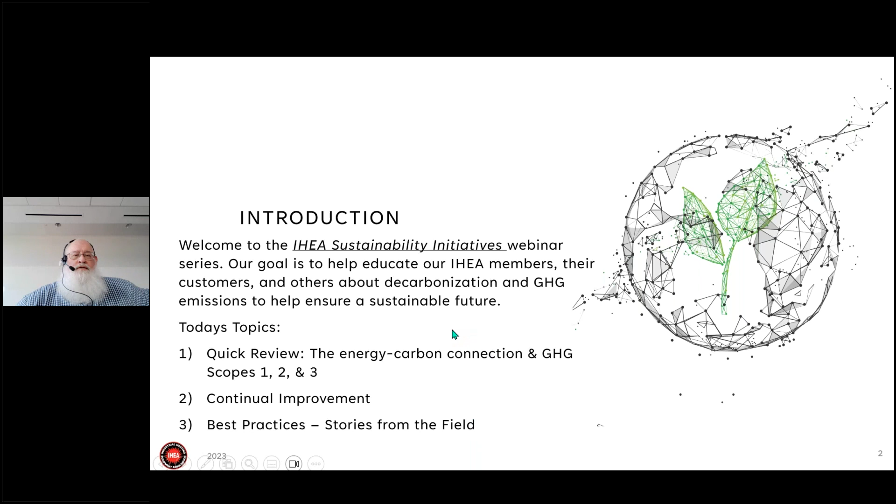Let's talk a little bit about the energy carbon connection. We tell people this all the time: the best way if you want to manage your greenhouse gases and your carbon is to manage your energy, because most of the greenhouse gases, and if not all of the carbon in your greenhouse gas emissions, comes from consuming energy. This is the big picture of energy.

Yes, I know this is an eye chart, but I just want to make a couple points here. If you look at the left-hand side, this is a Sankey diagram, and the left-hand side is the total of all the energy consumed in the United States in 2021, which is almost 100 quadrillion BTUs. Quadrillion is 15 zeros, so it's million, billion, trillion, quadrillion. And these are the sources. So this adds up to 97.3, and then it breaks apart and goes across, and the other side adds up to 97.3. So this is how energy flows through the United States.

A lot of energy, as you can see, is used to generate electricity. Looking at our areas, commercial buildings, but primarily industrial, you can see not that much of industrial is electricity. There's quite a few fossil fuels still being consumed, natural gas particularly, and petroleum products, a little bit of coal, but also electricity. I want to make the point that electricity is not squeaky clean. It's not all nuclear and hydro and solar. There's quite a bit of coal and natural gas still in the electrical generation for the United States. And this will need to change as we move forward into a greener environment. Hopefully we can reduce some of the consumption of fossil fuels in industry. And of course, you hear lots about electric vehicles down here. So that's kind of a really big picture of where the energy goes.

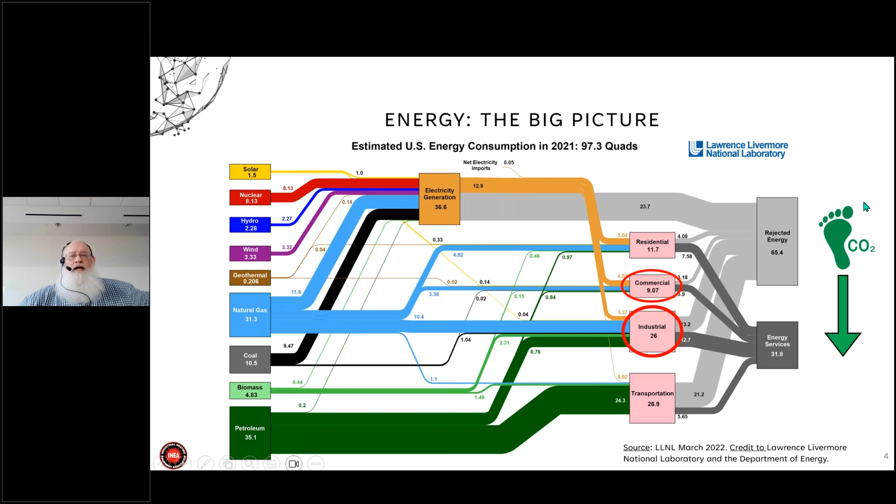Again, we're looking at how can we reduce our greenhouse gases through managing our energy. One thing to really think about is energy efficiency in terms of greenhouse gas reduction. This is what you pay for. You bring energy into your sites. You manufacture, you have a commercial building, a hospital, a college campus, an industrial process heating site. This box, that's your system, that's your building, that's your process, and you pay for natural gas and electricity and bring that in. You want to get as much of that energy as you can to add value to your product.

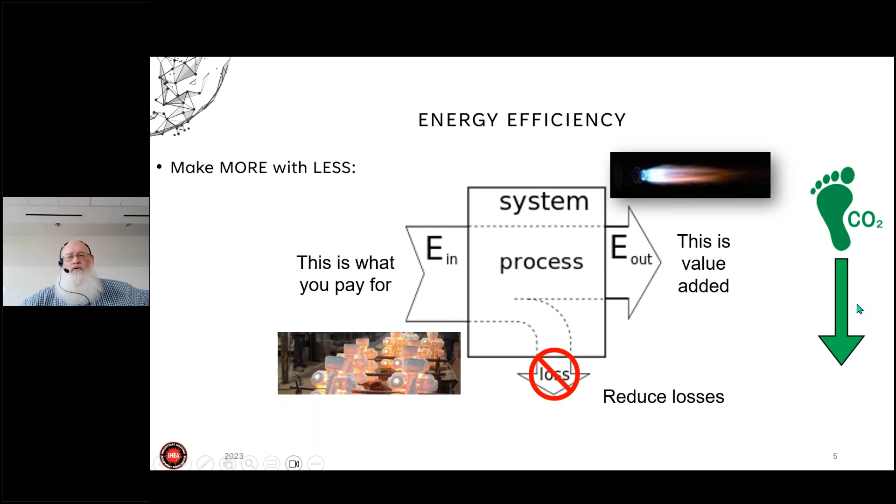And reduce these losses to an absolute minimum. That's what energy efficiency projects can do. And also, energy efficiency improvements will improve or reduce your carbon footprint.

Energy and carbon are directly connected. It's chemistry, there's no way around it. This is the way the world works. If you take methane or any fossil fuel organic carbon molecule with carbon and hydrogen in it and mix it with oxygen and combust it, you will get carbon dioxide and water vapor. That is the way the world works.

This is methane, and that's the pure equation, but if you think about typical combustion, you have air. So you have nitrogen that just kind of passes through, no reaction. Air is about 20% oxygen, 80% nitrogen, and a lot of little odds and ends. But again, methane plus oxygen gives you carbon dioxide and water vapor, plus the heat. You get the heat, that's what you want. The heat of combustion to do the process, to run the furnace, the oven, the melting, the baking of the cookies, whatever the process may be.

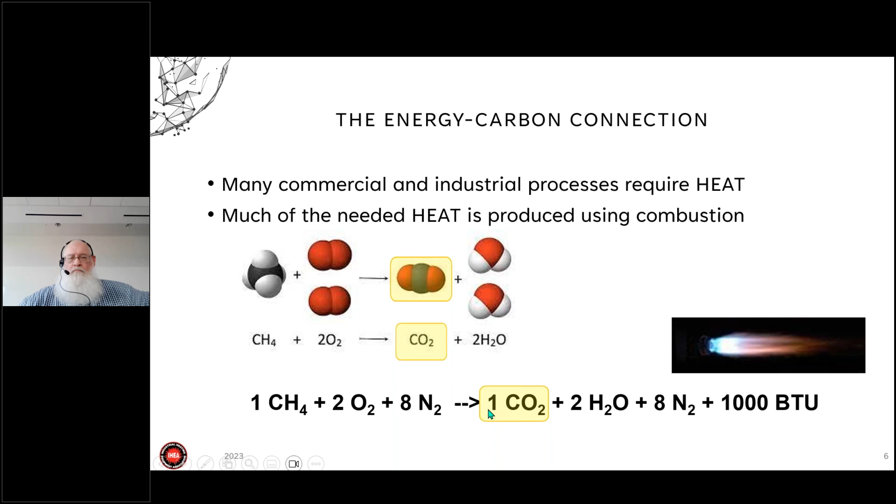But this is the problem, combustion - this is gasoline, diesel fuel, methane, coal - makes carbon. Thus, carbon footprint. Carbon is the biggest contributor to greenhouse gas emissions, and we'll see that in a minute.

Electricity may be a good alternative to combustion for a heating process, but electricity is not magic. Electricity is not free from carbon footprint impact.

This is the 2021 national energy mix of all the electricity generated in the United States, and a full 58, 59% is still generated from fossil fuel. So if you electrify a process, yes, you might eliminate natural gas consumption, but your electricity is going to have some component depending on your regional location and how your electric utility generates their electricity. You may have something that's very heavy coal or very heavy natural gas, or you may have an electrical utility that's very heavy on nuclear and hydro and renewables. So it depends on your location.

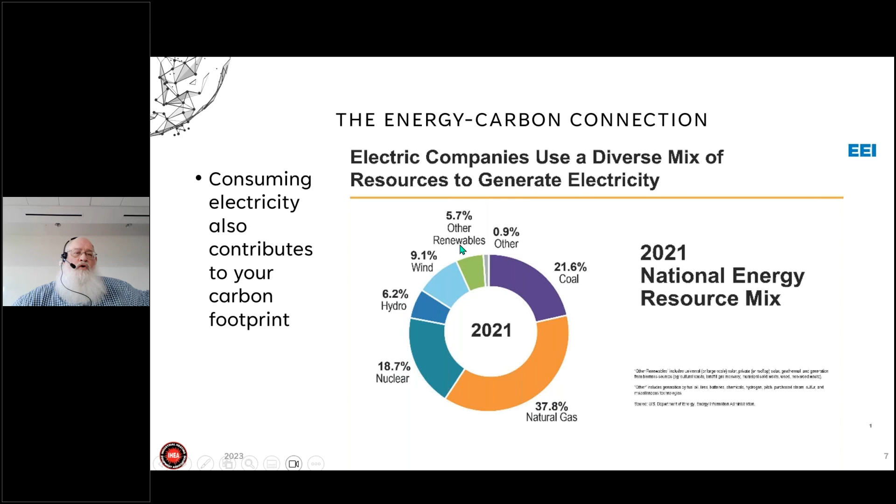Looking at this map of the United States, Alaska and Hawaii, different regions have different amounts of carbon, and these numbers you see in the big boxes are pounds of carbon dioxide created for every megawatt hour of electricity produced. So you can see there's a wide range. California is very, quote, clean and green electricity, versus Hawaii, which is 3 times the value, the amount of CO2 produced per megawatt hour of electricity. So this varies regionally. If you have a plant in San Diego versus a plant in Texas versus a plant in Minnesota, your contribution of carbon from the electricity you consume is going to be different.

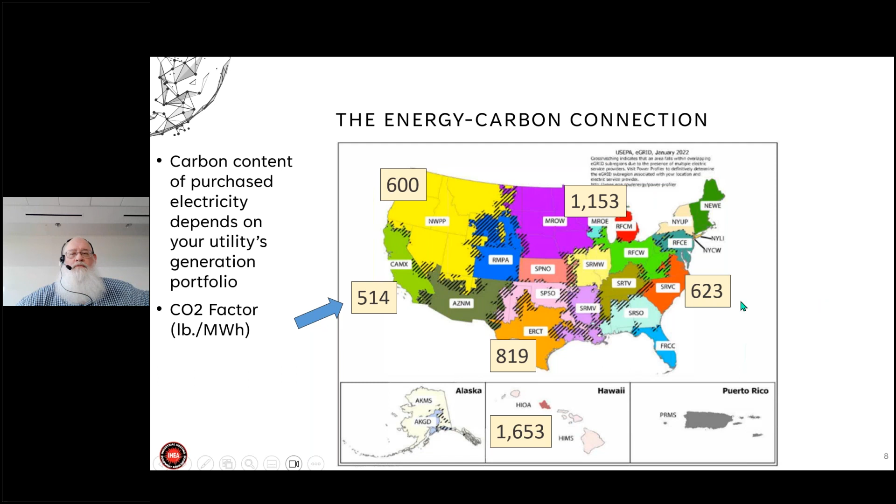Carbon combustion from natural gas is the same everywhere. It doesn't matter, you burn natural gas, you're going to get so much carbon out, period. If you consume electricity, the carbon content of your electricity will vary regionally, and there's quite a bit of variation. Those are just some example numbers.

So if carbon dioxide stays in the air for 100 years, it's going to warm the atmosphere because it captures the sunlight. Sun comes in, it heats the Earth's crust, it radiates, but it can't get back out to outer space. It's captured. It's the greenhouse effect. It's just like building a greenhouse. It can be 103 degrees inside a greenhouse on a cold winter day because the sun shines in the greenhouse, the heat can't get out.

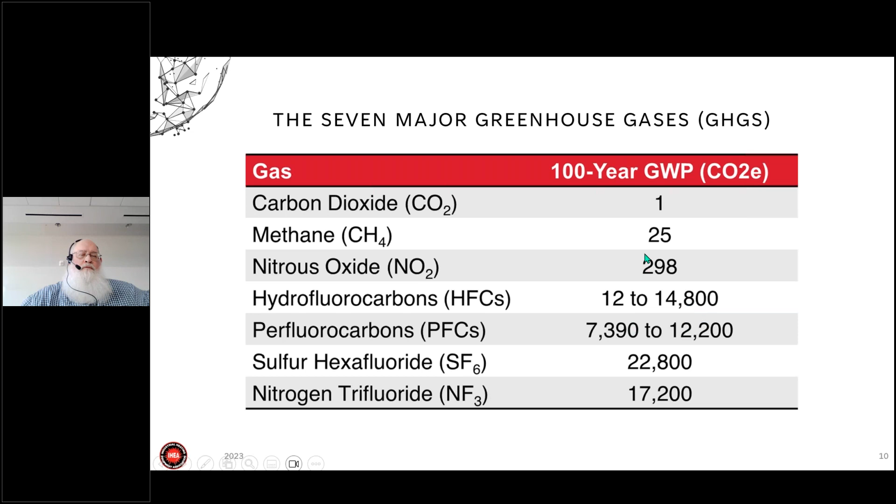It's much worse. But look at sulfur hexafluoride, 22,800 times worse than carbon dioxide. Now, again, there's not much of this around. It's pretty rare. But hydrofluorocarbons, perfluorocarbons, those are all the refrigerants in your air conditioning units. Air conditioning's everywhere, so there's a lot of this stuff out there. And if it leaks to the atmosphere, it can be very, very potent in terms of global warming.

But why do we call it carbon footprint? Because carbon is the big deal. Carbon is the big one. This is all from combustion in cars, internal combustion engines, boilers, generating electricity, all the process heating that a lot of the IHEA companies build and supply and their customers. And methane is second. Nitrous oxide is pretty big, and then the fluorinated gases, and you can see some of those others don't even have enough pie.

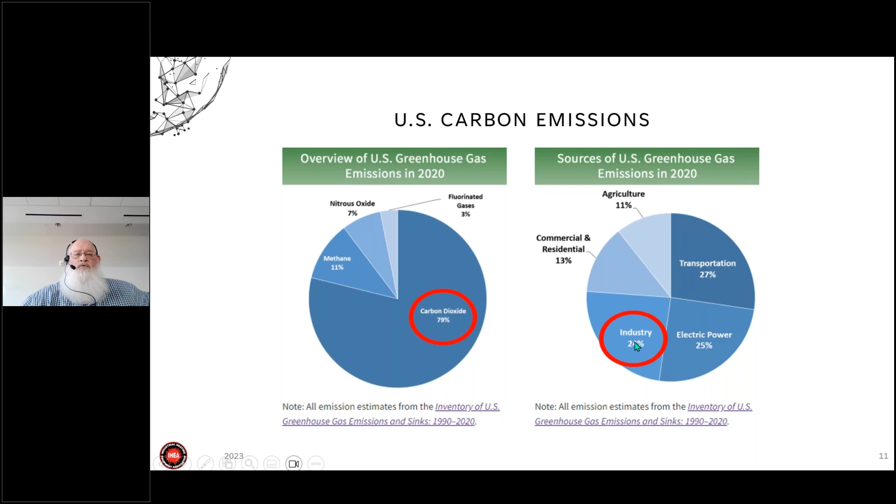But this is why it's called carbon footprint, because over 3/4 of the gas emissions from industrials, or this is from the US, not just industrials, come from carbon. And industry is about 1/4. So you can look at commercial and agriculture is about 1/4, transportation is a little over 1/4, electric power generation. So we're in this area. Most of us operate in the industrial area, and industry is responsible for about 24% of all the greenhouse gas emissions in 2020.

Greenhouse gas scopes. There's 3 scopes. There's more than 3, but there's 3 primary scopes. Scope 1 is that carbon equation. Methane plus oxygen gives you carbon dioxide and water. If you're burning, if you have combustion on your industrial site, if you make equipment that uses combustion and people use that, that is scope 1 carbon, direct emissions. You burn it on your site, the carbon goes in the atmosphere.

Or you have a lot of vehicles that you're operating with gasoline to run your business. Think about the US Post Office. They have 232,000 vehicles, and most of them are internal combustion gasoline or diesel engines. That's the internal combustion, that's direct emissions, that's scope 1.

Scope 2 is all the electricity that you buy. It can be other things, but like if you buy steam or chilled water, but mostly it's electricity. The electricity has to be generated somewhere, and you use it, but it has to be generated somewhere, like we said, with a regional carbon footprint from the generation equipment, and that's your scope 2.

Scope 3 is everything else it takes to run your business. Scope 3 is raw materials, how do you get the materials to your plant? And then you build it at your plant, that's scope 1 and 2, and then you ship it, and it's used out in the field, and that's all the downstream. So all the upstream impacts and downstream impacts of your product, that's scope 3.

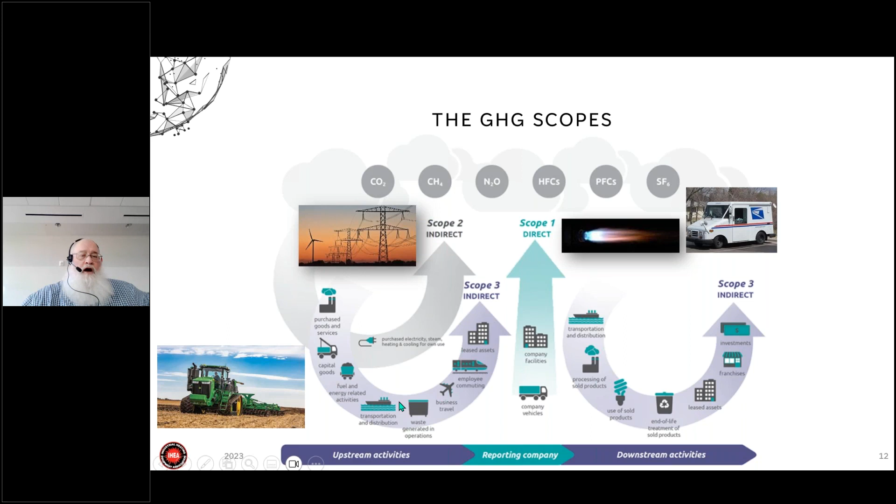So a little bit about continual improvement. One of the things that we want to encourage people to do that are looking at energy management and carbon footprint is to have a continual improvement process. This is an example of a company we work with.

It was a wastewater treatment plant, and this is kilowatt hours per million gallons of water processed over 18 months. They were around 7,000 kilowatt hours per million gallons, and they did some energy management implementation, some energy projects, and it really came down pretty quick initially, and then it kind of leveled out.

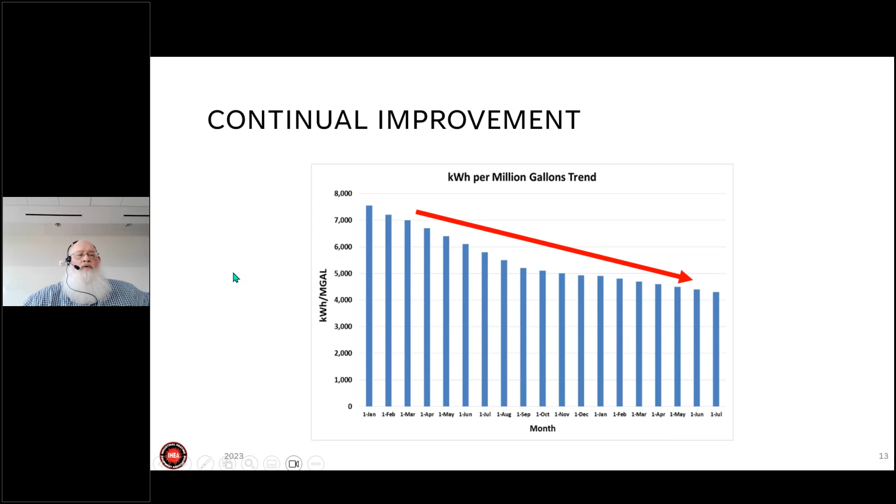It got a little harder to keep improving, but that's a great trend, and that's what we want to encourage. If you think about an energy management pyramid of various levels of managing energy, there's basic energy management, where you put your energy bills in a spreadsheet and track how much energy you're using. Then you may want to advance to other programs.

There's ISO 50001, the energy management standard for international standards. There's a 50001 Ready program. There's a Better Buildings, Better Plants program. There's lots of stuff available on DOE that you can use to help manage your energy and start improving. Then you can get full ISO 50001 certification, and Superior Energy Performance is like the top of the mountain. That's a DOE program—very rigorous, very challenging.

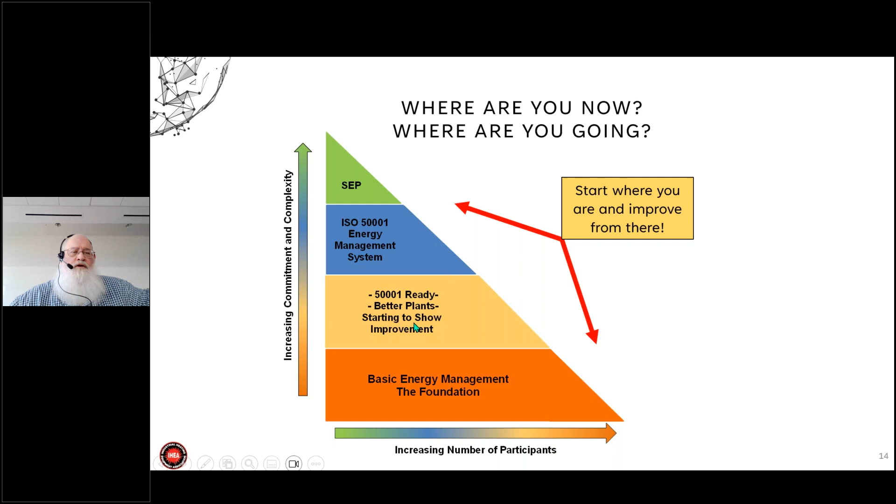So fewer people do this, many people do that, but as you go up this pyramid, it becomes more commitment, more resources. But the key for companies—IHEA member companies, IHEA customers of members, or anybody that does process heating or heavy industry, energy-intensive industries—the key is to figure out where is your point A and B. It doesn't matter what somebody else is doing. You can say, we don't really have anything. Let's start with basics, and we want to move up here to really improve and implement some energy management. So wherever you are, start where you are and improve from there.

Again, all of this that you do to manage energy will only help you to be more sustainable, to meet your environmental, social, and governance goals, to meet your carbon footprint goals, to be net zero by 2040, or whatever goals you may be facing as a company.

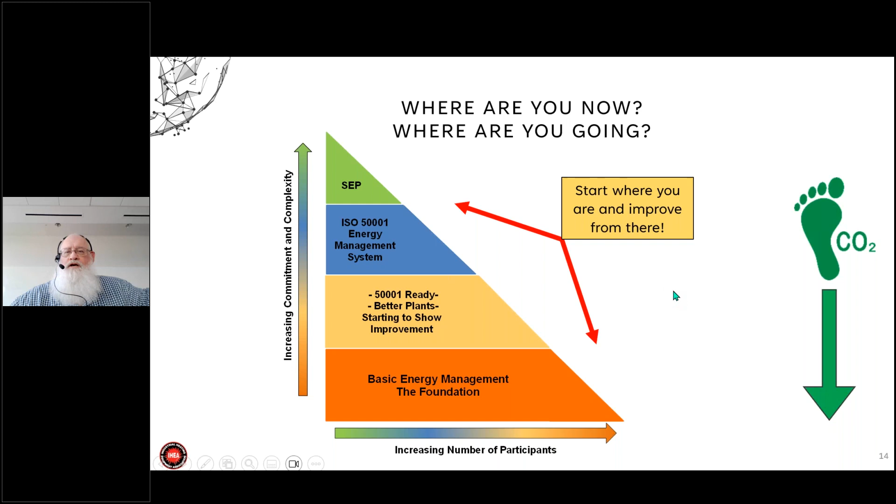Again, ISO 50001 is the energy management standard. The 2018 version is the latest version. It's a great document. It's not easy—it is challenging, and there's quite a few things you have to do to meet this and get certified. 50001 Ready is a program of training and implementation for 50001, sponsored by DOE, that you can do without getting certified.

And it's based on the Plan, Do, Check, Act cycle. In a nutshell, this says you say what you're going to do to manage energy, and then you do it. A little bit later, you check and see, are we doing what we said? And if we're not, we're going to act to fix it, and then we're going to repeat. This is not a project—this is a process. Plan, Do, Check, Act, Repeat. That's where you get the continual improvement. You build this into the day-to-day business activities that you have, and it's just part of what you do. Instead of being something extra for a project, this is just how we do—Plan, Do, Check, Act our energy, and repeat.

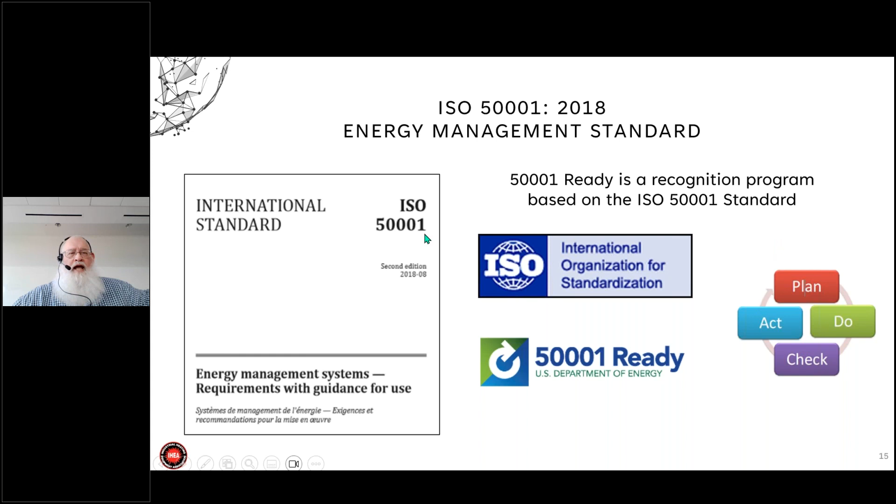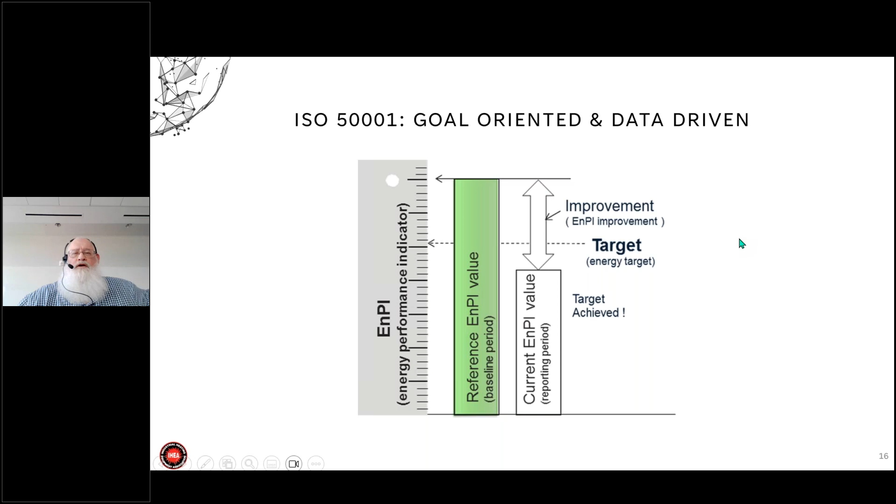ISO 50001 is very goal-oriented and data-driven. It's measured—you measure things. You intentionally understand your improvements, your targets. You measure baselines, you measure where you are today. You look at your baseline and you see your improvements. It's very data-driven, which is very beneficial. And again, this all ties into carbon.

50001 Ready, again, is a great tool. It's got all kinds of available source material, and it's all free. The DOE runs a cohort program where you can be a member of a group of 5 to 10 companies that go through a training program over 6 to 8 months, where you get taught about 50001 Ready. It's all free. The stuff you download from the tool is all free.

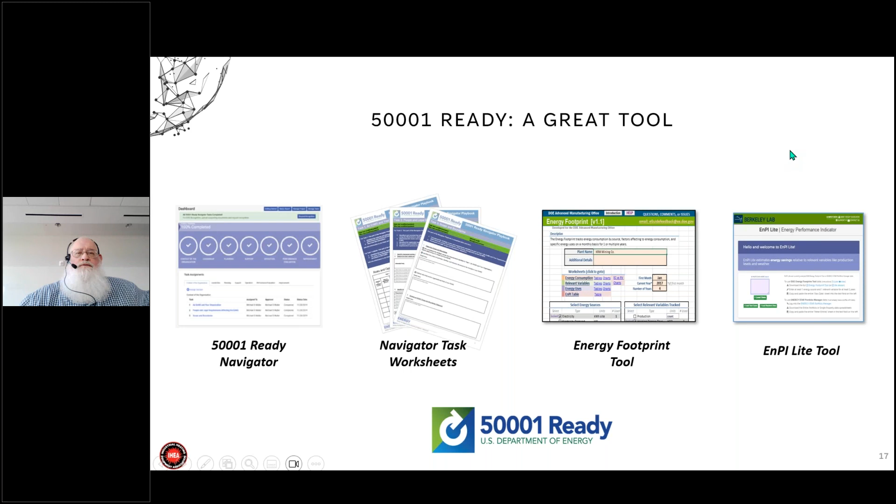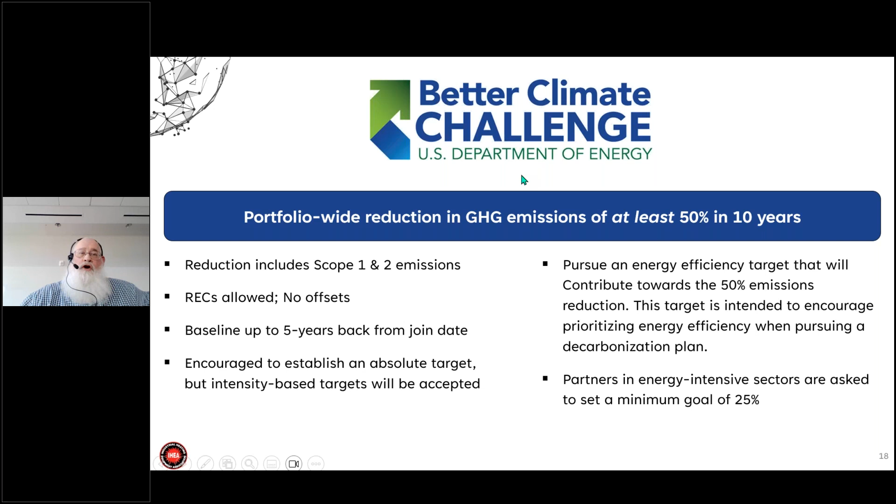It's a great resource. And then Better Climate Challenge—the Oak Ridge National Labs and DOE has started a Better Climate Challenge. In this case, you can sign up with your Scope 1 and 2 emission reductions, set a baseline, set goals, and work with a technical assistance person from DOE that can help you with your goals. This has a lot of tools, and actually, the previous session we did talked about a lot of the tools available from DOE. All free, all free. Okay, that's a little background.

We're going to shift over now and let some of our industry folks tell us some of the stories they've been seeing from the field and some of the implementations they've been doing. First off, we have Brian Kelly, and Brian, I'm going to give you control and you can take it away. Okay.

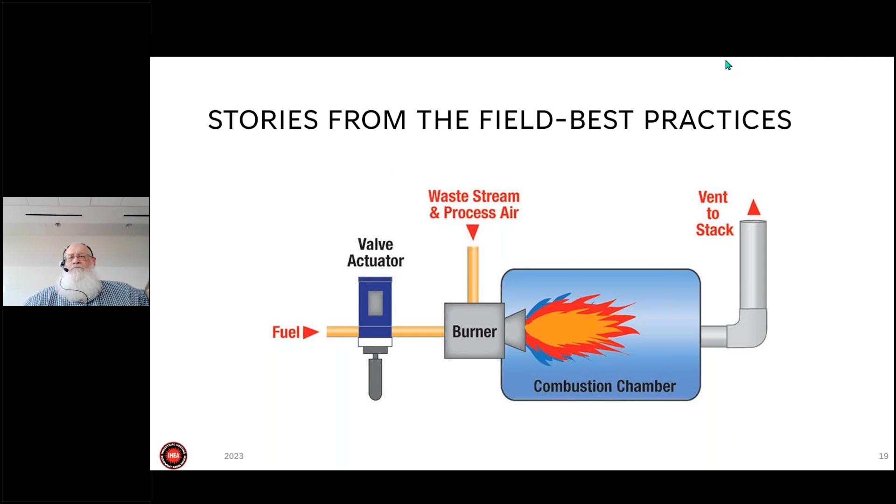Or what? Come on. There we go. So,

What we want to talk about here is when you start talking about sustainability, decarbonization, really when we talk about it in the thermal area - and Michael has more reach into a lot of the energy sector than some of us in the combustion business. Not that we won't be looking at other assets as well, but sustainability as it relates to thermal processes really relates to your consumption of fuel.

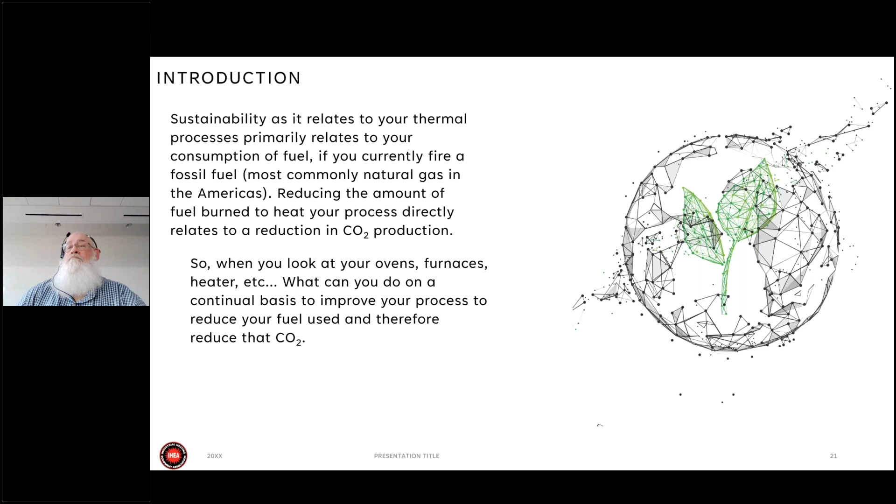If you currently fire a fossil fuel, most common is going to be natural gas, but it can be oil, other fuels, propane, things of that nature. But generally it's going to be natural gas. So if you reduce the amount of fuel burned in your heat process, that's directly proportional to the reduction in CO2. So when you look at your furnaces, your firing assets, your heaters, start thinking about what you can do on a continual basis to improve your process to reduce fuel, and therefore reduce CO2.

Efficiency - Michael mentioned efficiency. So the more efficient you are, the less fuel you burn, right? The more efficient you are, the more of that resulting heat from burning that fuel in your system is getting into the product - heating the air, drying the baking rolls, whatever it may be.

So I'm going to hit some real simple guidelines here. Most people - it's like when you need to look at maintenance and tuning, there's been plenty of places that say, hey, when's your last PM? It still runs. They push the button, it lights up, they're good to go. So some of this will actually add to your bottom line too, but also keep you more efficient, right?

Simple maintenance, upkeep of the equipment - look over the burners, the control systems, but even the units themselves. If you start seeing hot spots on your furnace, or there's holes in the furnace that you can actually see something radiate out of, that is making you less efficient. That means heat is getting out of that box and going to the atmosphere. It's wasted fuel.

Regular tuning of the thermal combustion systems - you start to look at, hey, where are we at? Do you have the records to know where your excess air is at? Another part of that is keeping some records. So depending on what your operation is, who's maintaining your equipment, they know where those burners were set, the PID loops were set, all the critical information that makes you effectively heat your product in the shortest time possible.

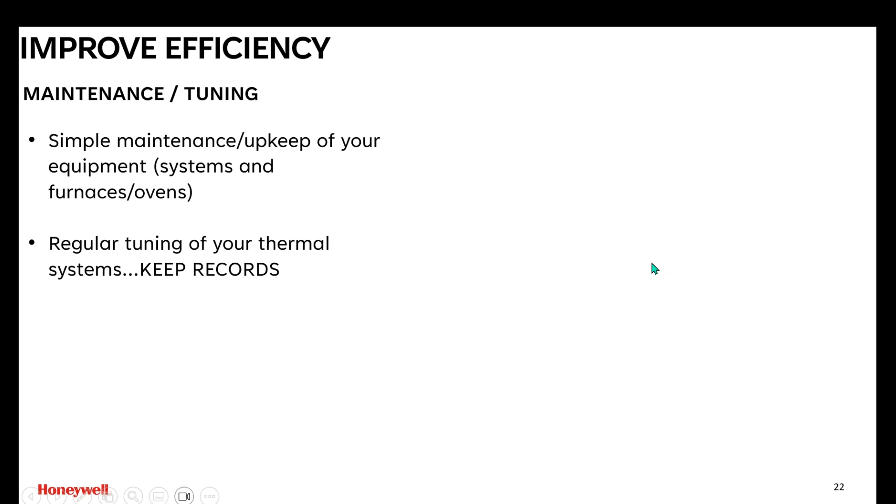Okay, this is a simple energy savings calculator. So I assumed our exhaust temperature is 1800, 35% excess air as our initial state. So no flue gas recirculation, oxygen's 20.9%. If we tune that system from 35% excess air to 10%, you'll see the resulting energy savings is about 17%. That's not insignificant. There are processes that require excess air at certain times, so you've got to look at your process and what your product can take as well.

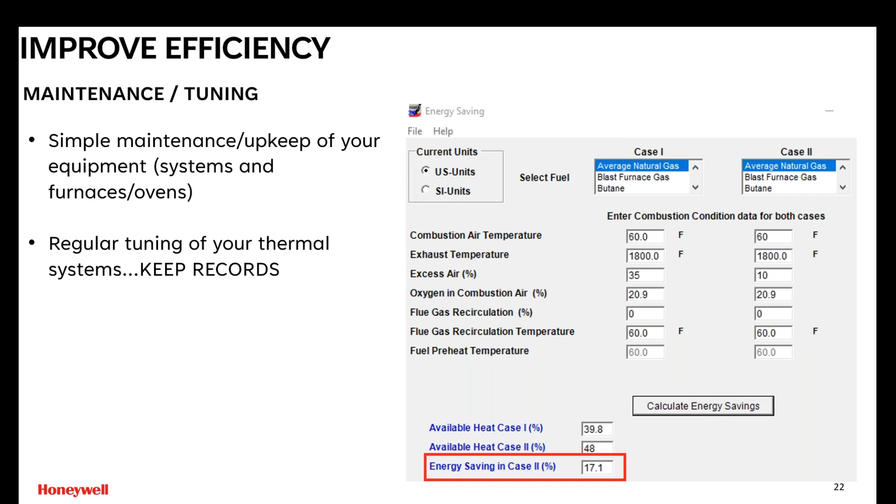Air fuel ratio control - the ability to maintain a tighter ratio between your air and fuel throughout the whole range of your combustion system is going to increase your efficiency and reduce fuel. Again, some processes require different air fuel ratios throughout a process.

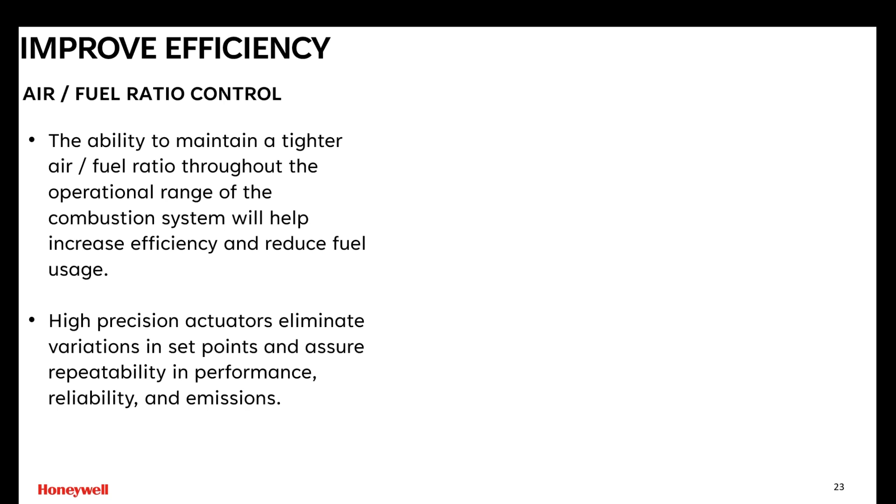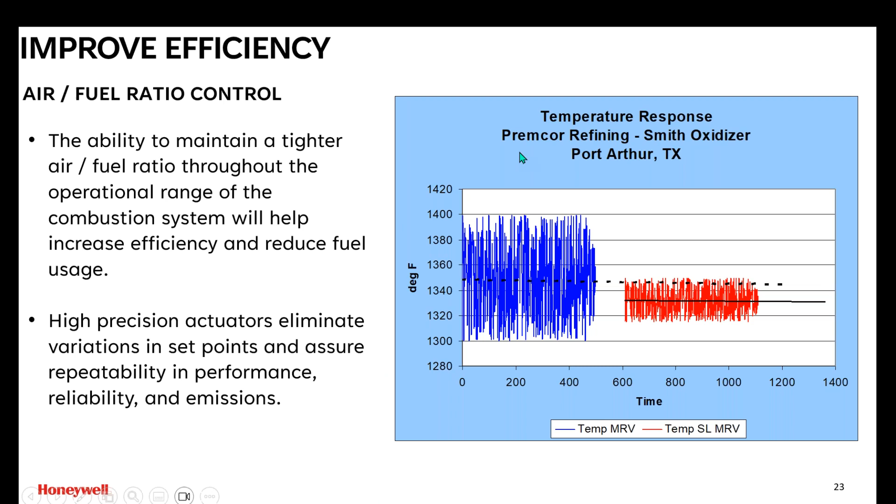Some things to consider: a lot of the US combustion air for your burner systems comes from a combustion air fan. It's pushed into the system, and it can be a single burner or multiple burner system.

Something that's gaining more notoriety, this has been done in Europe for many years and in different areas of the world because their fuel is much more expensive than ours. But this isn't just about fuel costs, which this technology will bring down. If you're firing more efficiently and preheating the air, you use less fuel, and that results in less CO2.

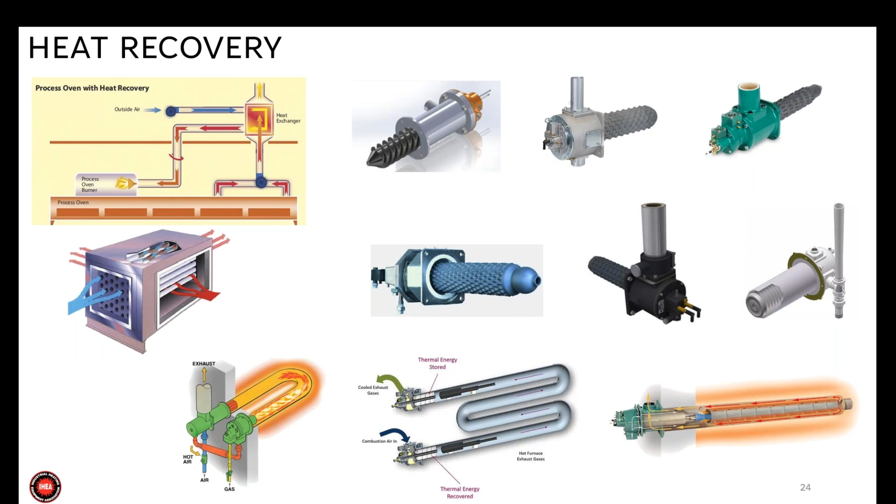So just some considerations: of course it's capital, but what you can look to in the future is, there's been plenty of talk about hydrogen, biofuels, and renewable fuels. If you have a situation where you may see that in the next 5 or 10 years, burner systems don't get bought every other year. So consider working with your combustion system suppliers and ask, if we go to an alternate fuel, can we be ready?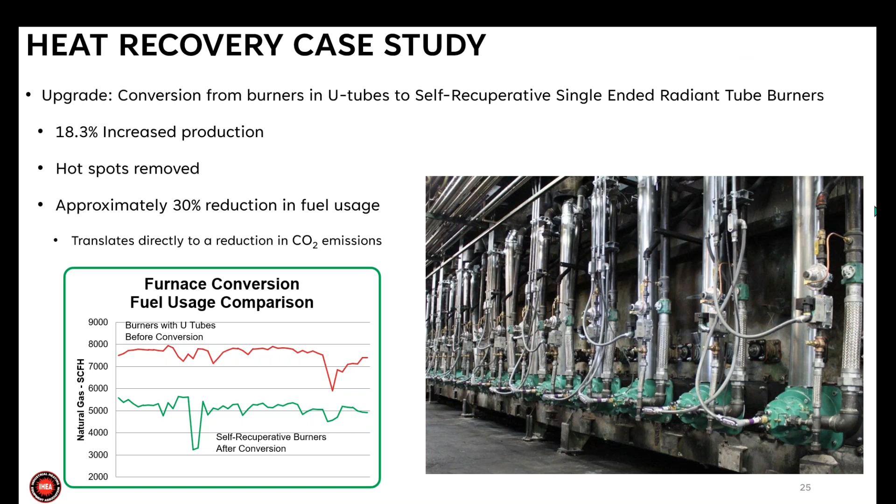Thanks, Michael. Trying to get control here. There we go.

All right, so I just wanted to go over a quick example. A few years ago, we had a client approach us, and they wished to reduce fuel consumption and decrease NOx from their continuous galvanizing line.

Their project goals were to hit an efficiency of about 73%, which was the minimum they wanted to achieve. They also wanted to, at the same time, decrease their NOx emissions.

I know we're kind of focused on CO2 right now, but a lot of times if you're making a change, that's a good time to look at your other emissions, stuff like NOx. It's an additional payback that you can get if you can decrease something else in addition to decreasing your CO2 or your fuel.

So this continuous galvanizing line was heated with W tubes. The burners in the W tubes were a suction-only type burner, so basically it had an exhaust blower that created a draft that pulled the combustion air in. Kind of an older design.

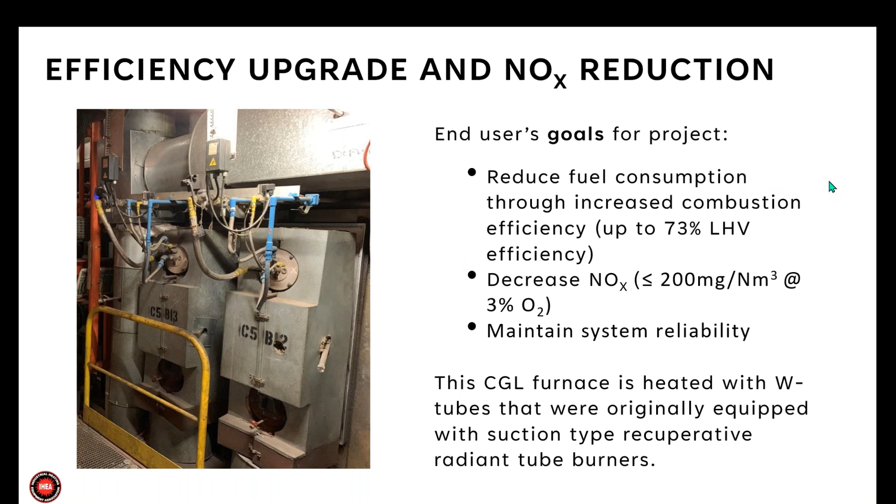What we proposed doing, our proposal, was to install a push-pull type recuperative radiant tube burner. So instead of having just a suction blower inducing a draft, we were going to add a forced combustion air blower that would add a positive pressure to the combustion air.

Basically, what that would allow us to do is utilize a longer and more efficient recuperator. The recuperator would be extended a little bit outside the furnace. Obviously, you wouldn't want to extend it into your furnace and rob heat from your process. But we were able to use a longer and more efficient recuperator to capture more of the heat leaving in the exhaust gases.

Something to point out is that, especially with 3D printing technologies and stuff of today, there are recuperator designs available now that were not available 10 or 20 years ago, that have a much higher surface area compared to past designs. So you can get a lot more heat transfer for a given length of recuperator with some of these new and innovative designs.

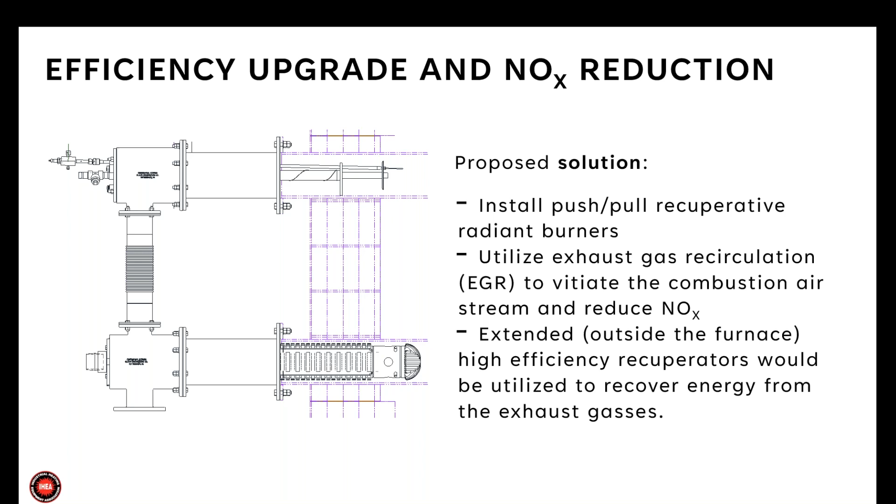So here's what our predicted performance was. What they had existing was the suction type only 2320 burners. Those had a gross power input of 186 kilowatts. They were getting an efficiency of about 60.6%. So not terrible, but not as good as what we would expect in a more modern application. And the NOx was actually pretty poor. Given that efficiency, that isn't the greatest of NOx.

Our proposed solution would actually require 151 kilowatts. Because we were going to be able to capture more energy from the exhaust gases and increase our efficiency, we just needed less fuel. So it ended up being about a 19% predicted fuel savings. And that ended up giving us about just under 75% efficiency, and our NOx was going to be cut by more than half.

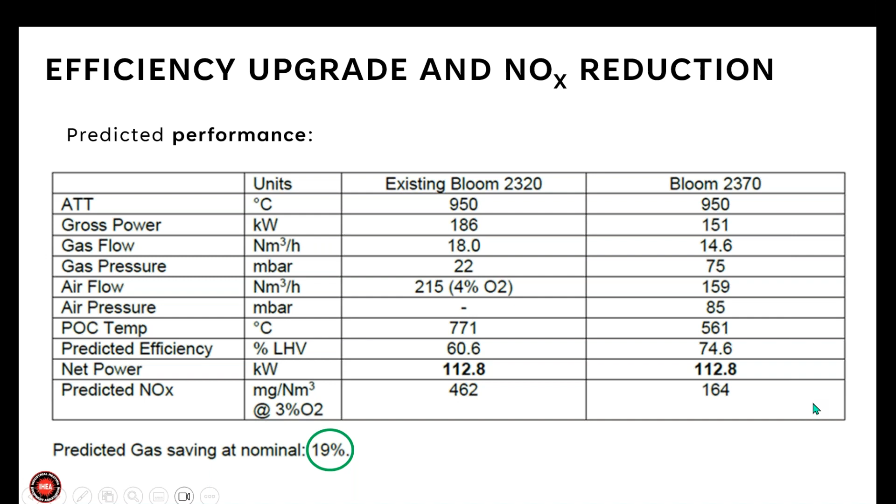Our final results: this isn't at quite the maximum temperature. A lot of times the maximum temperature isn't the everyday operating temperature, but at 840 degrees C, which is somewhere around 1500 degrees F, they saw a 76% lower heating value fuel efficiency. And that was about a 20% fuel savings, or a 20% CO2 savings for this customer.

They also saw a NOx of only about 110 milligrams per normal meter cubed. So for those of you who work in ppm, that'd be about 55 ppm at 3% O2. So a major decrease in NOx, and obviously meeting the fuel and CO2 reduction goals as well.

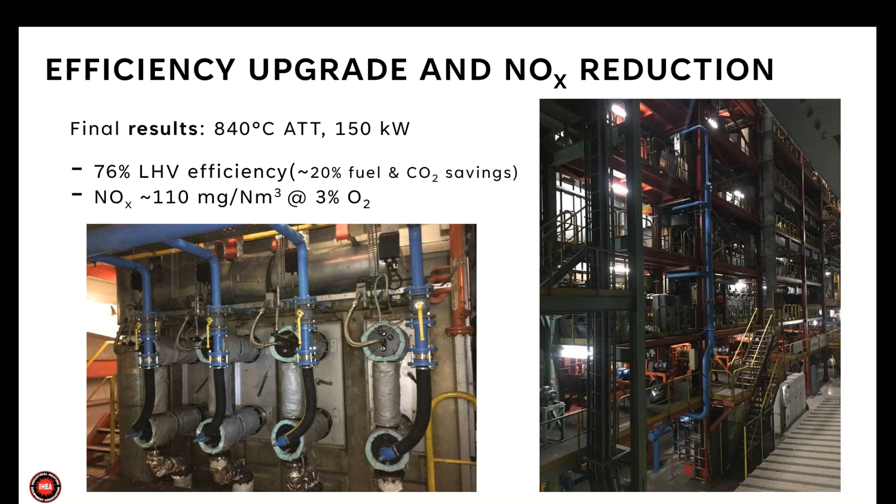Okay, good morning, everyone. Brian and Keenan did a wonderful job there of giving you some examples of CO2 reductions with conventional burner systems. To give the final examples, what we thought we might do is introduce something that's a little more revolutionary technology and somewhat unconventional, but represents some pretty significant opportunities for CO2 footprint reduction.

As Michael had presented with the chemistry of combustion and the basics most everyone's probably aware of, most of the time we combust fossil fuels with air as the oxidant source. There is an alternate technology available where we can eliminate the 80% of air that is represented by nitrogen and replace the oxidant by using pure oxygen to burn fuel.

This isn't an uncommon technology if you think about oxyacetylene torches, which is fundamentally the same concept, but the advantage for carbon dioxide production is quite simply that it tends to be much more efficient in transferring heat to high temperature processes. That improvement fundamentally comes from the fact that you've eliminated 80% of the oxidant mass flow that, once it reaches the process exhaust, carries heat out of the process. And so quite frankly, the process does a better job.

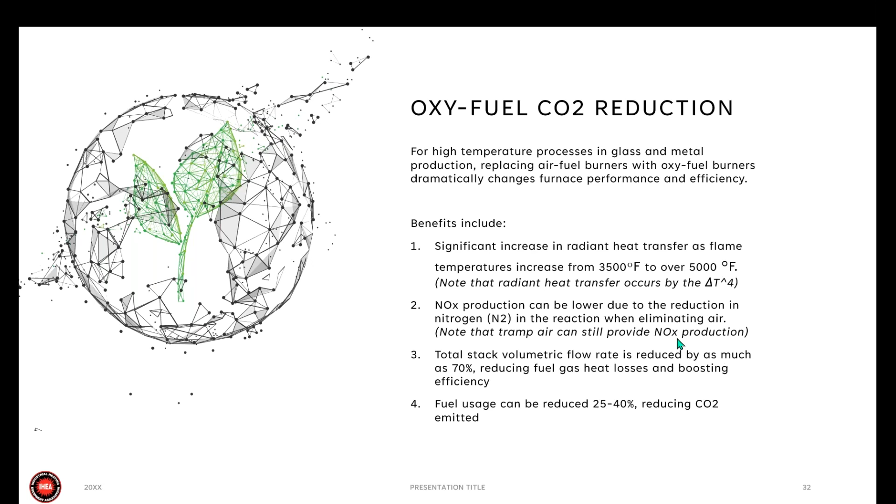Thank you. So first I want to speak about oxygen natural gas firing. Again, this is a relatively simplistic setup where we eliminate combustion air blowers and we convert the oxidant in the reaction from air to pure oxygen.

The carbon dioxide production is going to typically be dropped by 25 to 40%. Again, it can be very dependent based on what the application is, how the furnace is designed, how tightly the furnace is sealed. But again, pretty impressive numbers in terms of total reduction of fuel.

However, I want to also point out that economically, this does not mean that the total operating cost will drop by 25 to 40%, because the big disadvantage of oxy-fuel firing is that you have to pay for oxygen. So instead of just a natural gas bill, you also have a cost to procure or generate oxygen to fire the process. Typically, once all that's accounted for, we have experiences that say your total fuel savings and your total production cost savings will still land in the 10 to 15% range, but there is an offset to the reduction in fuel consumption made up by the cost to acquire oxygen.

Another side benefit is that electrical consumption tends to drop because we've eliminated combustion air blowers, and the larger your combustion systems are, typically the more horsepower you're consuming. And of course, the net benefit that we're all looking for, frankly, is carbon dioxide is reduced significantly when converting from air-fired to oxy-fired.

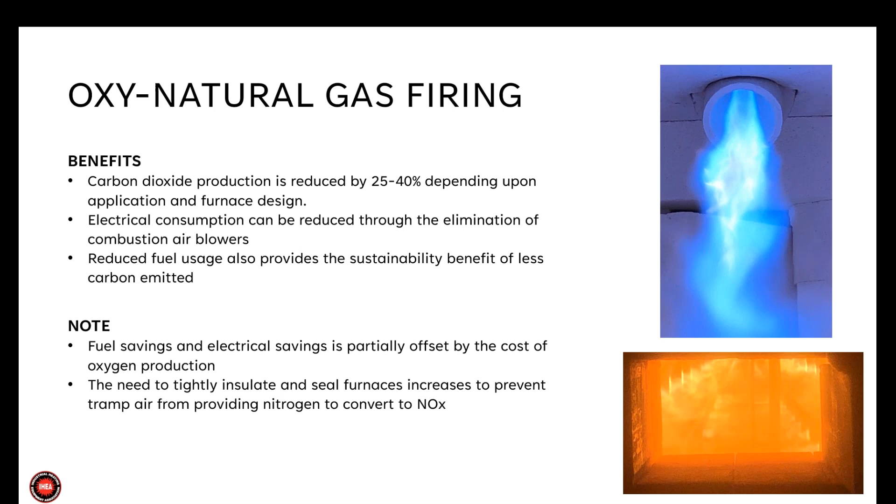Now, the future looks pretty bright when we think about oxy-fuel firing because, of course, the ultimate end state is to not use carbon-based fuels at all. And I'm happy to report that Selas and a number of other manufacturers are already well on the way to qualifying a number of oxy-fuel burner systems to be fired with hydrogen as a fuel instead of carbon-based fuels, be they oil, natural gas, methane, propane.

So from a reduction in carbon footprint and from a total energy efficiency perspective, this is a technology that is coming online today. In the steel industry, there have already been a number of demonstration projects and conversions where they're working on green steel manufacturing processes that are burning hydrogen, and some of those are also burning hydrogen with oxygen. There's also at least one demonstration project that's been started and proven out of Europe, where they're melting glass in a large glass melting system for container glass, high firing the furnace with oxyhydrogen burners.

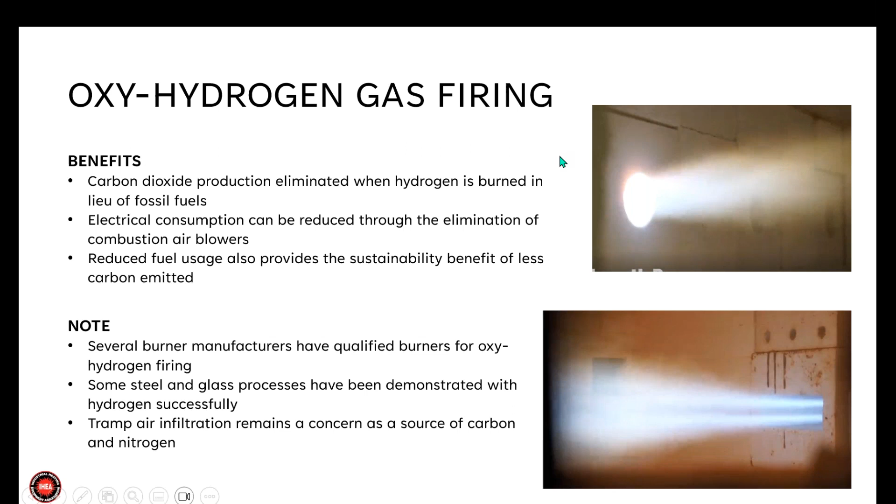So I'm gonna just kind of summarize, and we do have a good amount of time for questions. Just remember that as you have a need to manage your greenhouse gas, or more commonly known as carbon footprint, managing your energy and understanding your energy consumption is a great way to manage your greenhouse gas and carbon footprint. Understanding your energy sources, how you use and consume those, and the various scopes of carbon to inventory them, scope 1, scope 2, scope 3, and so forth.

A lot of companies are moving down that road. Right now, it is mostly voluntary in the United States to account for your carbon. It may not always be voluntary. It may become law at some point in the future for carbon accounting, or even taxation on carbon, but that's down the road.

Great ideas from three people that are in the middle of this industry and really looking hard at this from their companies: combustion processes, alternatives, and getting the most you can out of your existing equipment, which is the right place to start. Then maybe as technology grows and develops, you can increase and improve.

Everybody's not going to go out tomorrow and be able to buy something new, even a traditional burner. But get the best you can energy efficiency out of what you have now. That will impact your energy and carbon, and then move forward. Great ideas and some good thoughts to take away.

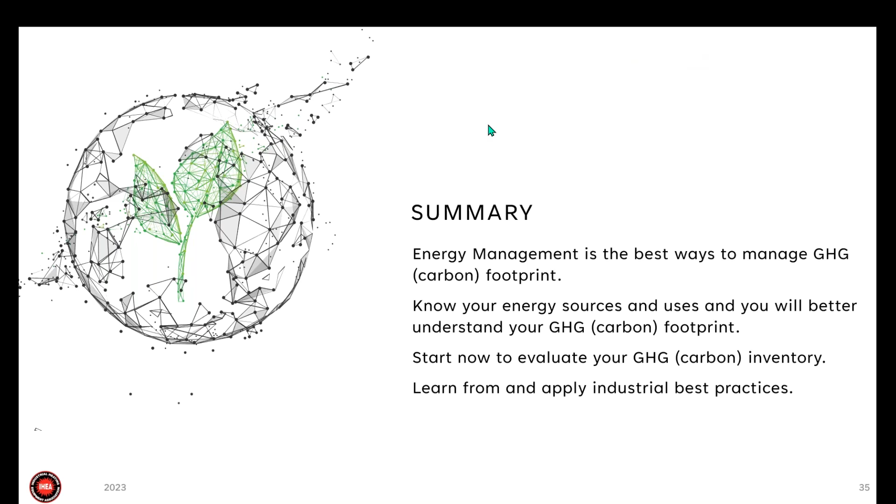Thanks. So the first question we have here: if on-site oxygen generation via pressure swing adsorption will increase on-site electricity, will that be more than the blower electricity savings? If any of the speakers want to address that for us?

This is Jeff Rafter, and I'll tackle that. Yes, typically PSA oxygen generation does take more electrical consumption than combustion air blowers, but specifically in glass melting, if you look at conventional air-fired technology being replaced by oxy-fuel, you still tend to generate 10 to 15% total energy and operating cost savings. So yes, once factored in, that does make a difference in terms of your total electrical profile. But when you look at the whole process front to back, moving to an oxygen-fired system over a recuperated air-fired system still continues to reduce your total fuel usage and operating cost.

Thanks, Jeff. Next question: does it make sense to look at oxy burning for lower temperature applications where historically they used less than 200 psig steam?